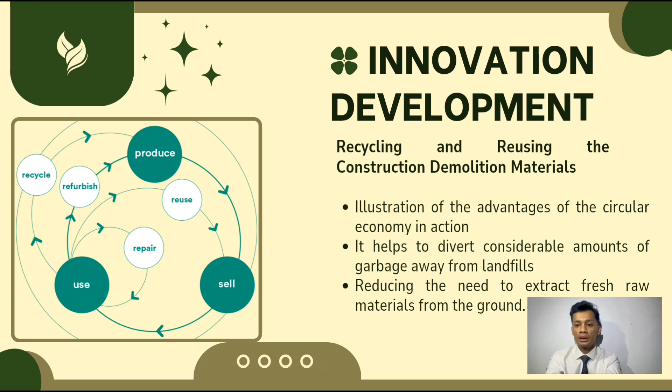Plus, community benefits too. C&D, that's construction and demolition, reuse can create local jobs and even help keep the architectural vibe of an area alive. Imagine a modern building that still keeps a piece of history in it. So yeah, innovation in construction isn't just about tech and big machines. Sometimes it's about being smart with what you already have.

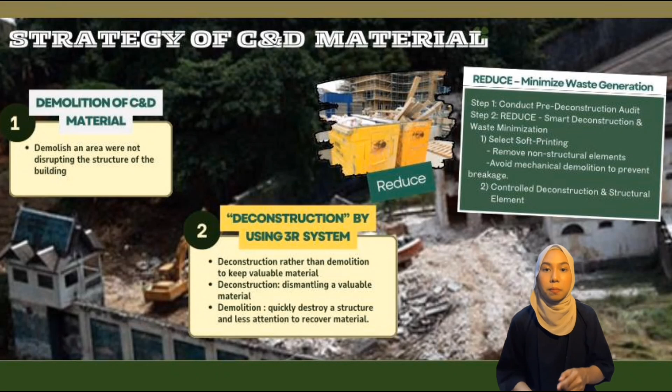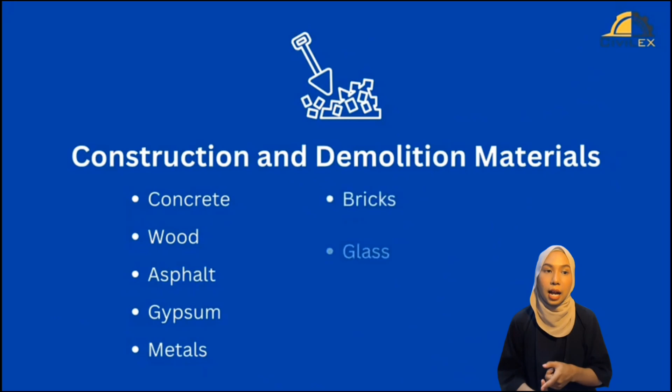Next, I will present our comprehensive strategy to manage, mitigate, and sustainably handle the construction and demolition of Penjara Pudu, known as C&D material. C&D waste is actually the material produced during the construction, demolition, and renovation of buildings, bridges, and roads. This includes a wide array of materials such as metal, glass, wood, salvaged building components, and other debris.

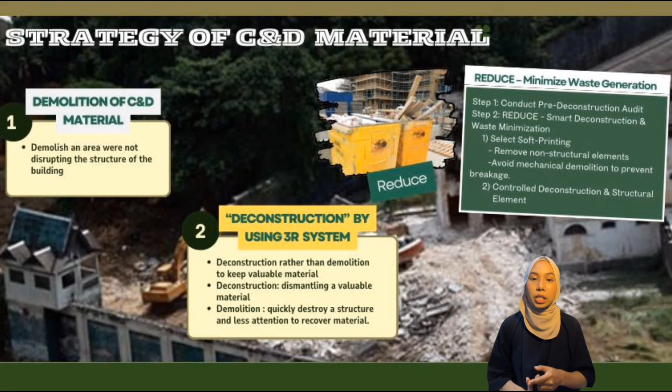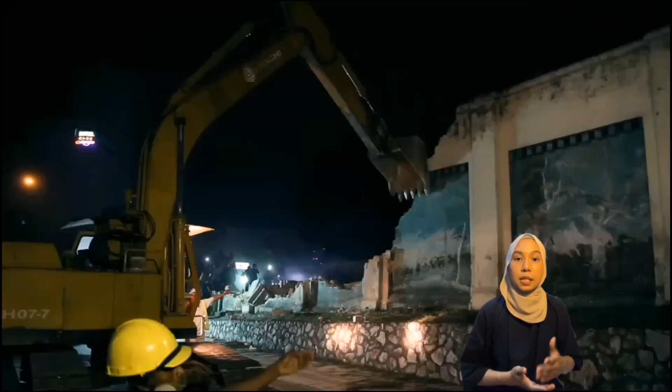Based on our case study at Penjara Pudu, our strategy is structured into several core pillars. First is pre-demolition planning. In this phase, we emphasize the importance of conducting environmental audits, material inventories, and feasibility studies using BIM design tools. Next is the demolition of the C&D material in certain areas of Penjara Pudu that will not disrupt the structure of the building, so the material itself can be reused and recycled through the 3R system.

Then we take a second approach by proposing the 3R system using deconstruction. We carefully deconstruct rather than demolish valuable areas as an approach to preserve usable material and heritage value.

Then we reduce the C and D material by performing controlled deconstruction of structural elements. We step in with selective soft stripping that carefully removes non-structural elements like doors, windows, wood panels and sanitary fixtures to store, reuse or resell. We avoid mechanical demolition to prevent breakage.

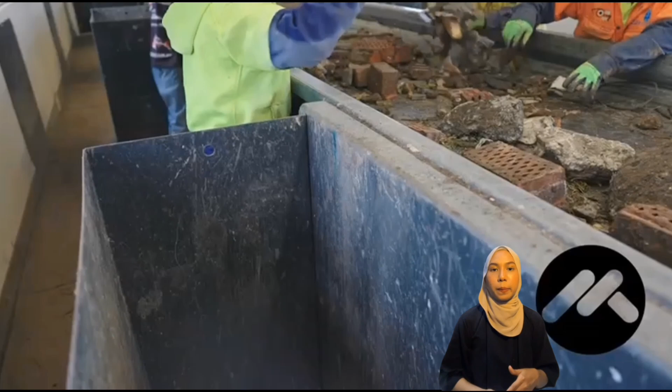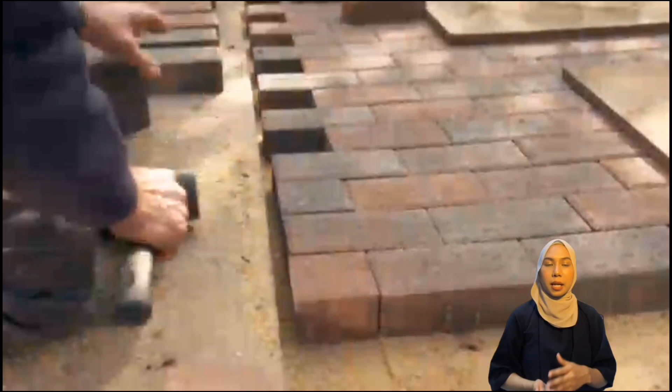Next approach is reuse, by sorting on-site reusable material. Reuse, preserve and reintegrate the heritage material to maintain the cultural value and reduce the need for new resources. For example, historic brickwork and stone: carefully dismantle and clean the material for use in pavement, pedestrian walks, public

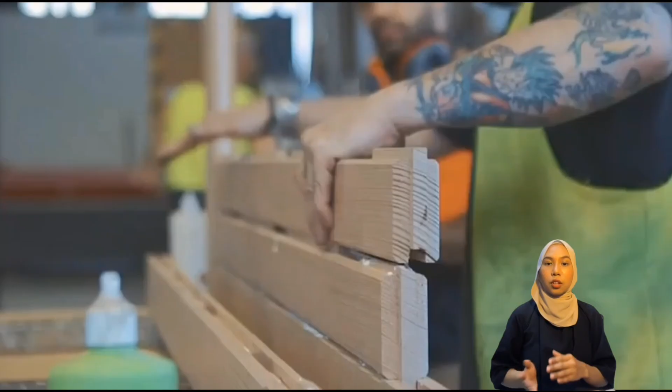spaces, and facade treatment. For the timber beams and the doors, refurbish and reuse them in interior fittings for a local museum and cafe inspired by the present architectural style. For example, like this gallery located in Subang Jaya.

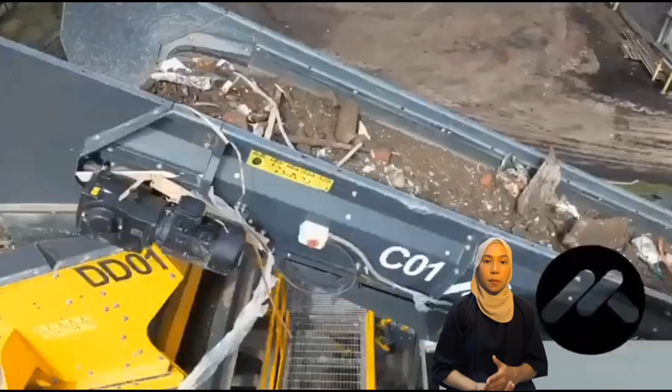Next is recycle, by converting the waste into new construction input. Process and recycle the remaining C and D material by diverting the rest of the material from the landfill to transform it into a usable resource. Last approach is adoption of technological integration. This mobile recycling is portable and can recycle and process concrete, asphalt and brick directly at site. Last but not least, we want to adopt dry processing recyclers that have zero water use.

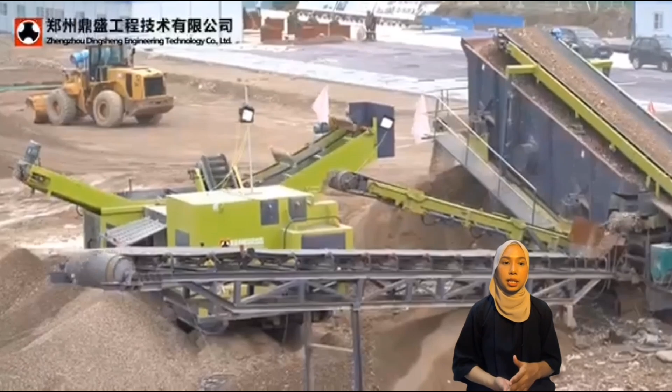Third, sometimes we use more specialized equipment, also custom ones, rather than conventional. Next is the increased sorting and storage cost from sorting the material and storing the items from the deconstruction process. Finally, it will affect the processing cost for recycled material, such as crushing concrete.

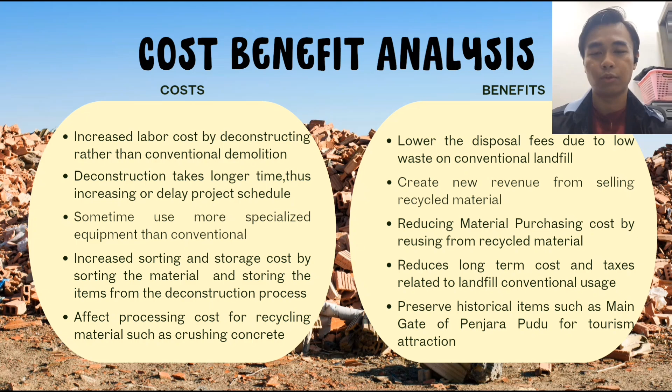Okay, second is the benefit. Firstly, it will lower the disposal fee due to less waste in conventional landfill. Second, it will create new revenue from selling recycled material. Next, it will reduce material purchasing costs by using recycled material. After that, we will reduce long-term costs and taxes related to conventional landfill use. At last, it will preserve historical items such as the main gate at Penjara Pudu, which by the way is our case study for the project.

Now for the sustainability or innovation impact, where we must evaluate the long-term sustainability benefits of our innovation. There are two types of benefit, first the environmental benefits. For the beginning, it will reduce landfill waste and storage. Next, it will decrease air pollution from natural resource extraction for construction, like timber, manufacturing from factories, and also transportation from diesel lorries. Lastly, it will reduce greenhouse gas emissions like methane in the long run.

Now, second is the social benefit. First, it will create new job opportunities in the recycling industry. Second, it will give a positive image for communities, especially residents near the disposal or industrial area. Third, a new market will emerge and more demand and supply for recycled construction material and technology will be created. At last, property value increases around disposal and landfill areas because of reduced pollution and also high green environmental awareness.

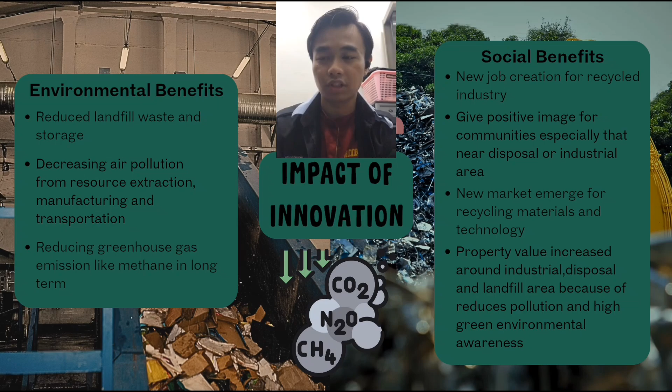In conclusion, by transforming construction and demolition waste from a burden into a valuable resource, we can unlock substantial economic benefits through material reuse and energy efficiency while drastically reducing our environmental footprint and paving the way for a truly circular economy in construction.